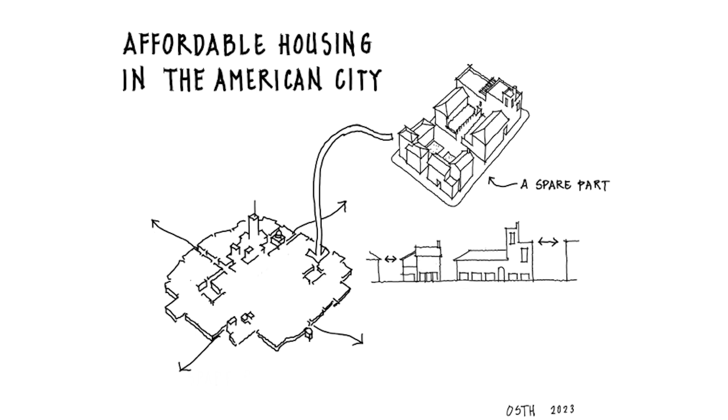I want to reference the talk Hugh gave to kick off the conference, about Cat Fiddle Street. This is another project very similar in the sense that you're trying to create a sense of wholeness about a neighborhood, using innovation at the same time to deliver a place that feels like it's always been there.

Witold also referred to the book by Christopher Alexander, A New Theory of Urban Design, in which he unveiled five principles for development. He also added agency, and parenthetically I'd like to add a sixth, which is stewardship. One important thing in the book is that Alexander was talking about that sense of wholeness within the project, but also within the city.

So the relationship between what Cat Fiddle Square is doing and what we're talking about today are very similar challenges. Ray will take us through examples of developing those same principles: a sense of place, ease of getting around the city, enhancing the city while providing a diversity of income to avoid concentrations of poverty. In many ways, the big picture here is like a spare part trying to fix an area of the city.

We are very lucky to have Hugh Petter here from the UK, who's come across the Atlantic to share the project of Nansledan in Newquay, UK. This project is almost like a new town, built from the ground up even though it's an extension of an existing town, built with traditional patterns to develop jobs and opportunities, sustainable practices, and a remarkable 30% of affordable housing.

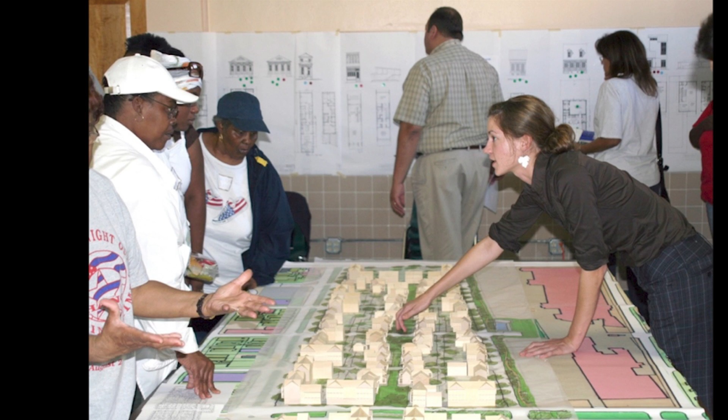Well, the developers went through the roof because they claim it's much more expensive to do individual houses than to do townhouses and combined buildings. So this is where the pattern book idea comes in, of standardizing the box, or letting it be whatever the home builder wants to do, and then having the front facade as something that's tailored to that culture and that particular place.

You can see a street elevation from the design at the bottom, in which we have a collection of buildings, including a double shotgun. I didn't point out that the Volkswagen was in front of 2 units, not 1 unit, in that previous image. It's a really skinny house going back, and creates a varied street facade, which you can see here on the right.

For me, the greatest moment was when the president came to cut the ribbon for this project in 2012. He spoke of the revitalization of Treme, not of the Lafitte project. So it had become part of the community, and therefore that stigma has been released.

I'll talk about it again a little bit. Early project, 1978.

Richmond, Virginia, an African-American neighborhood with an affluent part on the left, and a large area that had been cleared for urban renewal. There had been several plans, but after talking with residents, we came up with another—really the first pattern book. They asked us to design all the houses, and we wouldn't do that. We thought there needed to be more variety. But we did do facades.

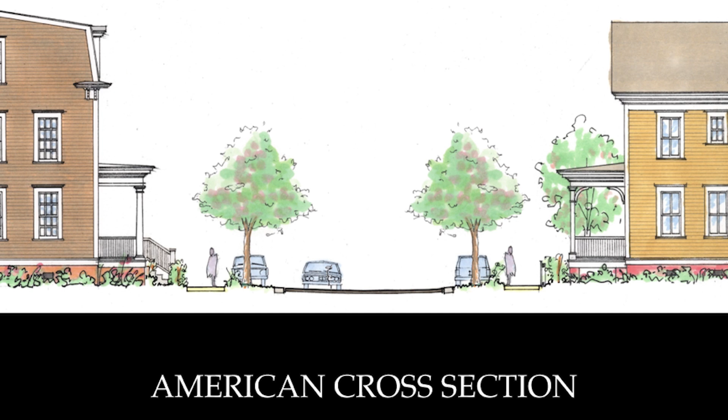We have a responsibility to the community to maintain our property and treat it well, and to take care of it, watch it, supervise it, make sure it works. Here is one in Tampa and one in Edenton, North Carolina, where we have streets lined with these porches, with these in-between zones on the side, to create a unified example.

Back to the Randolph neighborhood that I showed you earlier, these porches are super large for the size of the houses. They're tiny houses with big porches on them. And we had a couple parks in the plan.

This photograph was taken in 2018, more than 40 years after they were built. Immaculate. The park is not maintained by the city, it's maintained by the neighborhood, by the families around it. And every time I go to revisit it, the same thing happens.

The most recent one was a little more entertaining. My wife and I were going to a meeting in Richmond one Sunday afternoon, and we stopped on our way and parked over there on the left, just about near that fire hydrant. And I got out and started walking around, and my wife stayed in the car, and she was observing things.

A man came out from his house, opened the door with a broom, and started sweeping. Then the next door neighbor came out with a broom, and then 3 or 4 ladies down the street came out with a broom. So finally my wife figured she better do something. She went out and started talking to them, and said, well, my husband is an architect and was involved in designing this. So the man turned into the house and said, 'it's that architect again, he's come back.'

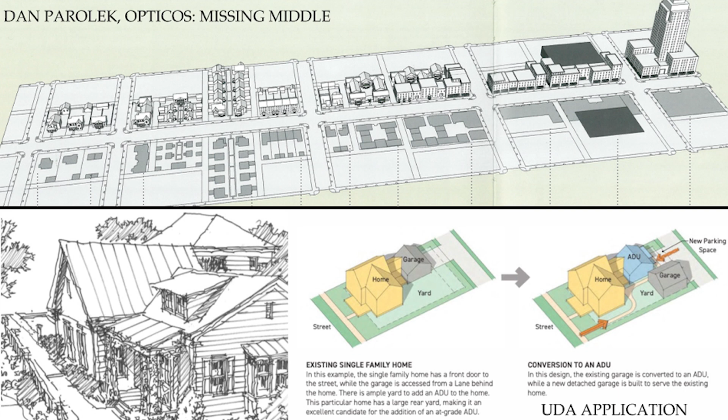Dan Parolek of Opticos has done a great service in his Missing Middle book, which you see on top, looking for different kinds of types—courtyard houses, accessory dwelling units, and other things. UDA picked up on that with a pattern book with recommendations for how it might be done in a specific location. Union Studio took it quite literally, looked at their building types and prototypes, lined it up, and used it as a strategy for going into neighborhoods.

In New Orleans, in the project I showed you, we have a lot of diversity of building type in terms of the different types of houses, and there's even a senior building broken up into several buildings. However, it was intended to be mixed income, but it was right after Katrina. It took a long time to get it built. There were a lot of people who evacuated to faraway places with an urgent need to get back, and the policy was changed to make it all public housing except for one block.

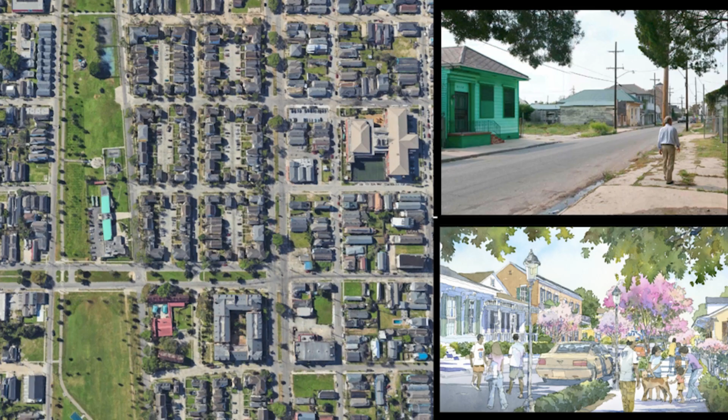So here it is from the air—you can see it. And I was really depressed about that. I thought, we're not going in the right direction.

Treme had been in terrible condition but suddenly became a hot property, particularly after the Katrina restoration, when New Orleans became a hot location. People were buying falling-down houses for $200,000 to $300,000 and fixing them up. So Treme is becoming gentrified, but we have this stock of permanently affordable housing, so in the larger sense this is a diverse community. That's another strategy we can think about.

Final topic is legible and easy to use, and it comes back to Alvin Schorr. He said there's evidence—he combined a bunch of studies and analyses to make these points, and these are not just platitudes. Our ability to understand the city and to use it is directly related to our success in life. So I've personally felt, at the beginning of my career, a moral obligation to try to design cities that people can understand and use and easily function in.

The Great American Grid, an equivalent grid that connects every door to every other door, comes back to the title. The key thing is the relationship of the front door to that grid, so that you are connected to every other door, which means connected to opportunities and new experiences.

This little guy here, when we look at the larger picture, is on a street in Manhattan, and his street connects to other streets—maybe not providing a direct pathway to Wall Street, but it's there. Of course, it's the Horatio Alger tradition of rags to riches. The American 19th century, early 20th century city has been called the most efficient upward mobility machine in history because of this.

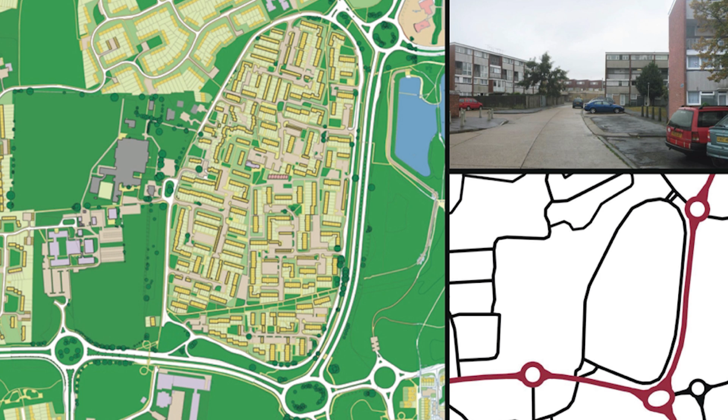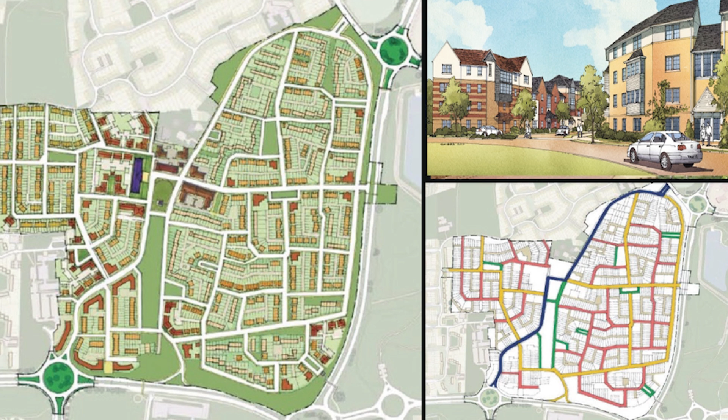Of course, our proposal was to add streets, complicated by the fact that more than 50% of the existing buildings had to remain. When we did it, some people were very nervous—they said our children don't know how to cross the street, because the only streets they'd had were the highways around it. Now, if you're preparing for life, can you imagine if you enter life and you can't cross the street? What are you going to do? So this stuff can really hurt people, and did for a long time.

Final example is one I'm involved with now—original conception, and now as a backseat driver. This is downtown Norfolk on the left. You can see, easily, three different public housing projects with 1,700 people in them. You can also see, if you spot that round shape, the Nervi Stadium arena, and a huge highway separating the downtown from this lower project. The question is how to bring it together.

It's also an area that floods very badly, particularly on the right-hand side of the site. So the plan did several things: created a carefully designed park to manage water, a network of streets—a major north-south street connecting the Martin Luther King Memorial on the north to a mid-19th century beautiful Catholic basilica—and connecting streets that link it to the city, with buildings of different kinds of uses fit within that framework.

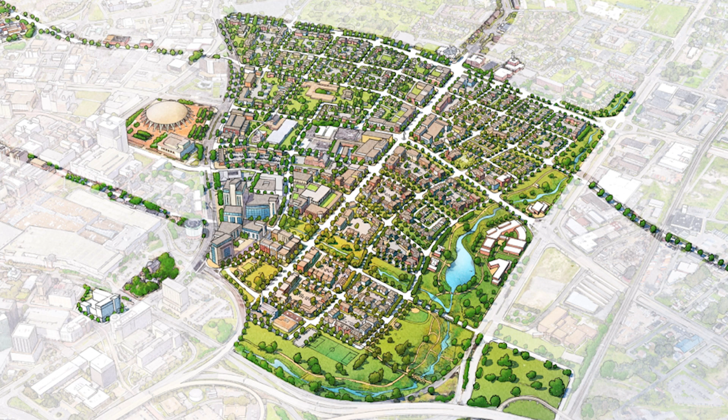So you've got to get that framework right by then. And these are some of the images of those spaces which are meant to be the orienting spaces so people can find their way.

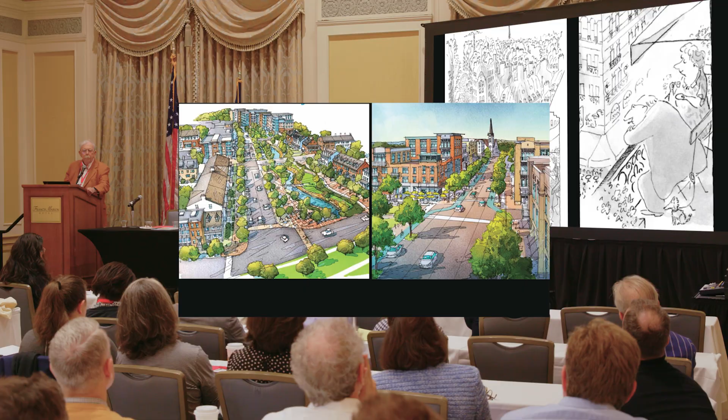I'm going to conclude with Sempé. This wonderful image of an imaginary Paris. You see two people looking extremely self-contented. So there's no image problem here. They're looking out at the neighborhood, which we know looks after everybody, including cats.

And they can clearly see and understand the structure of the city. This is our ideal. But look carefully in the upper left. There's something sinister up there. It's a construction crane. I think the man is looking at it, wondering, is that going to help us continue this tradition, or is it going to undermine it? I think the former is our job. Let's do it. Thank you.

Ray, that was fantastic. You certainly set the bar pretty high for me, but I'll do my best to follow on. Can I just say, first of all, what a pleasure it is to be here. It's my wife and our first time in Charleston, and thanks to the ICA and everyone who's made us so welcome here. It's been the most fantastic visit, the most fantastic conference with some great talks, very stimulating as well, and it's a great pleasure to be part of that.

They say that our two countries are divided by a common language. I'll do my best this morning to disprove that assertion, but I apologize now if I say things which are not familiar to you, and by all means, let's pick them up in questions at the end. So I'm just simply trying to address the theme which Eric gave.

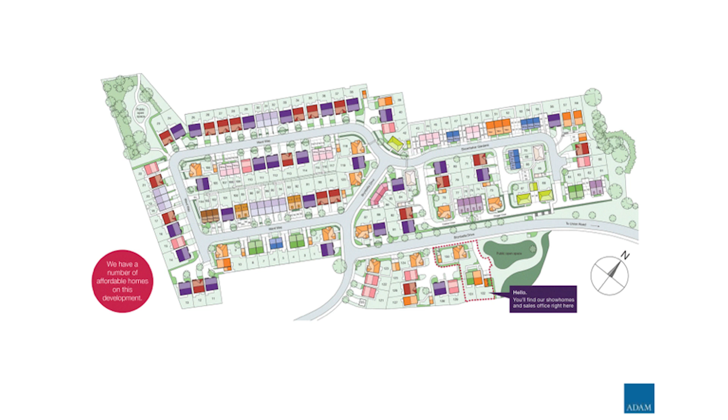It's not beautiful, and it's got this very poorly defined public realm, as you've seen in some of the earlier slides and presentations today. And these, of course, as we've heard already, are very depressing places to live and can be the cause of all kinds of other social issues which become much more difficult to unpick.

And because of all these issues, development is not popular. It's ugly, it has no benefit for those affected by it, and because everything is tuned to deliver maximum short-term financial return and not necessarily meeting local needs, all the developers'

needs, which are at the top of the pile, if you like, it becomes very difficult to convince people development is a good idea. And to my mind, it's become a vicious circle where, because of bad development, it's unpopular, it creates political pressure, there's yet more regulation.

Which increases the cost of permission, thereby reducing the gene pool of developers even further, and so it gets worse and worse and worse. And that's been a progressive problem that we've been wrestling with for a very long time.

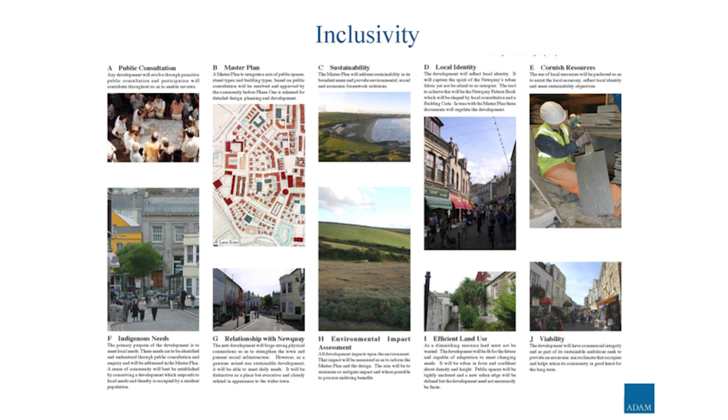Making sure we respond to local needs, making sure what we do relates to the older part of the town, thinking about environmental impact to try and improve the ecology of the place by weaving that through the scheme as well, using land efficiently, and making sure, of course, that it is viable. In this economically deprived area, viability is quite challenging.

We've been on site now for 8 years, and we have been building at 100 houses a year. We've got about 650 houses built at the moment with a wide variety of tenure types and sizes, as again you've heard from Ray and others. The idea is that we're the only people really in Cornwall building family houses.

Newquay, where this town is built, is the surf capital of Britain. It's got the best surfing beach in the UK. Someone even amusingly called it Surfbury when it started, but that's another joke.

The idea is to create a place where you can bring up a family, and over your own life you can move within the development too. So there are starter homes, family homes, homes for older retired people. The idea is to create a community where people can move but stay close to their friends and build that sense of togetherness.

Within the master plan, and I think this is something slightly different from some of the earlier phases of Poundbury, we've been very dogmatic in our coding of it to create a clear street hierarchy where the typologies of the buildings relate to the different types of streets. So this is our main street where we've got grander architecture, grander boundary wall treatments, bigger front gardens, 2.5-story buildings, grander use of materials and so on. So whether it's an individual villa, a semi-detached house, or even a small apartment block, typologically you know you're on a main street because the buildings reinforce the urban network created through the master plan.

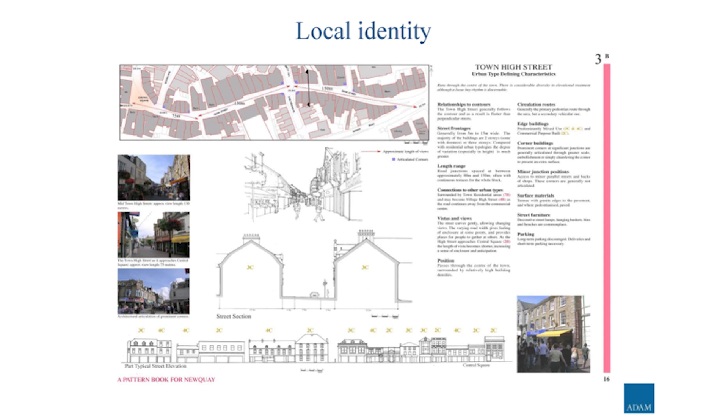This is the High Street in the old part of Newquay, looking at how it responds to topography, the size of the view corridor, the canyon of the street, and the types of buildings that define its edges. Really just trying to understand the nature of the kind of space which is familiar to people, and also thinking about that Atlantic coast with severe weather - we find the streets are often quite tight to give that degree of protection from the full fury of winter weather.

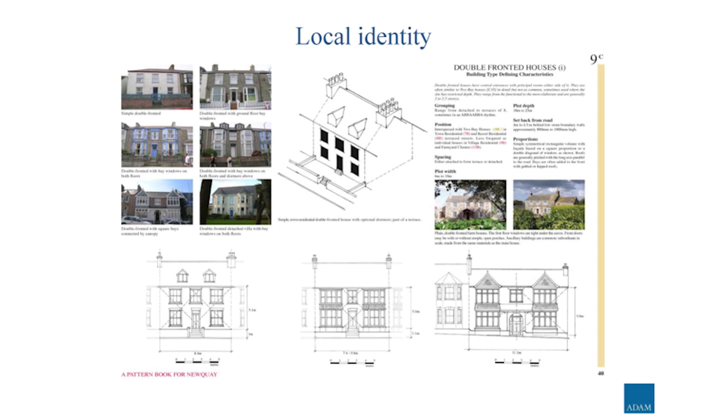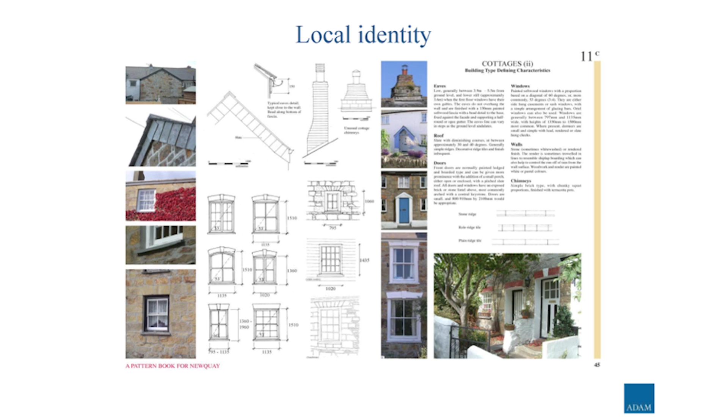We look carefully at the sources of local materials. There's not a huge choice, but we know from tried and tested buildings of different eras that these materials respond well to a harsh maritime climate. So we need to look carefully at how we can work with the quarries and producers to make it possible to use them again. I'll come back to that.

We found the pattern book we produced was playing back to that local community who'd become visually blind to the character of their town, as we all are to a degree by familiarity. When you produce a pattern book, people see their town with new eyes. We used to describe it as a maypole around which everyone began to dance, because it got everyone excited about what was special about their town and how you could start to do new and creative things with it. Also, with the materials, it's how you put money back into the local economy to create better economic sustainability.

My third point, again picking up on Ray's phrase, is the dwelling as the mirror of self, and that sense of self-identity is hugely important. Everything that Ray said, I completely agree with.

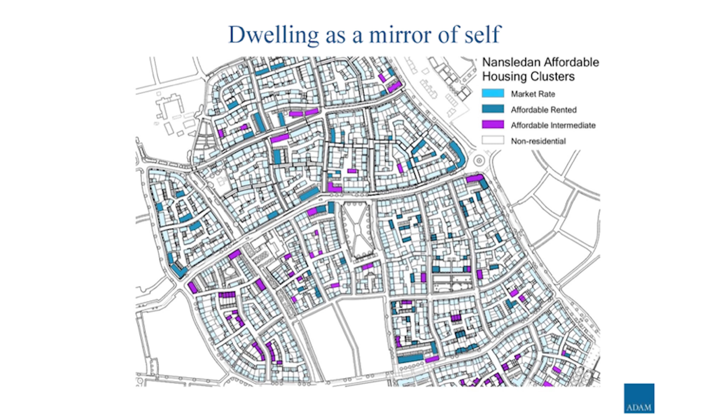I mentioned the issue of the holistic view of sustainability, and I'm now on a zero carbon working group for the Duchy. The buildings I'm showing you here are what in the UK we call a LETI standard, which is almost passive house in terms of embodied carbon, but we're using local materials. We achieve that by using local slate, which has low embodied carbon, and concrete blocks made from China clay waste, a local waste material 10 miles from the site.

So although the built materials are traditional, by taking time to understand what you've got locally and working with the suppliers of those, you can start to make a huge difference in the amount of embodied carbon you use.

With the granite quarries, we found out what shapes of granite they could use and make cheaply. Some of the granite is quite rose-coloured and some is silver. The silver granite is generally used in the City of London—it's the most expensive material, which we can't really afford. But 40% of what they produce is the colour with iron flecks, the rose-coloured stuff, which we think looks fantastic. So we take everything out of the quarry that they can't sell to London in terms of the variety of material.

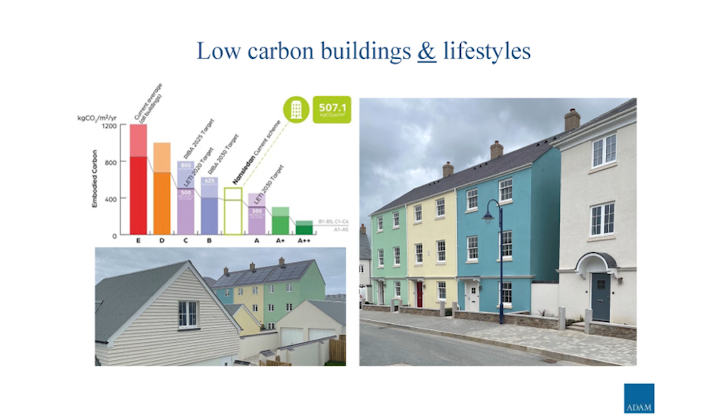To the credit of the council, they said, unlike normal policy which takes a 5-year view of future need, take a 50-year view of what the needs of this town are. So you can think long term, and then work back from a big vision into shorter term delivery horizons—everything fits into a bigger picture.

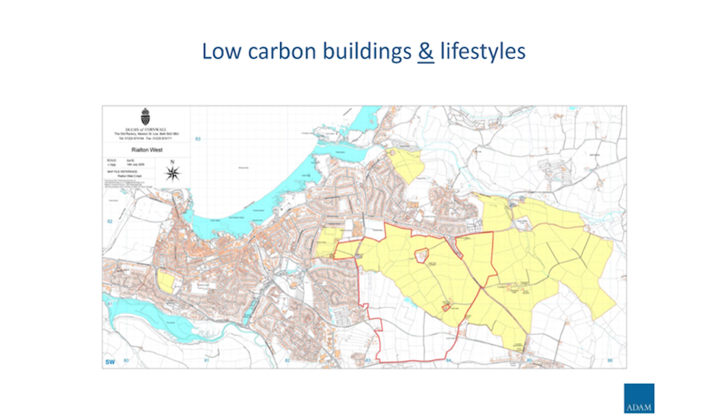And the vision was to create a new sub-town centre to support the existing suburban areas as well, to help revitalise those, as well as meeting the needs of our new community.

We're building at 100 houses a year, so it takes a long time, but you're building in tune with the pace that material suppliers can keep up with you, and at the saturation rate that the local market can absorb as well.

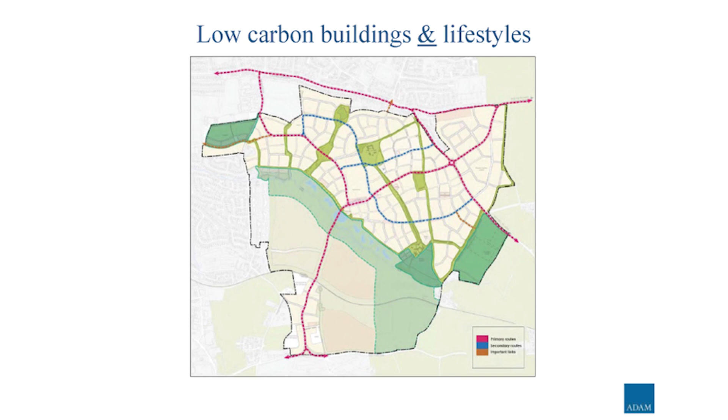As a firm, we've developed network analysis software, which we market as Place Logic, and it produces a heat map of the desirability of some routes over others. We were challenged in our design review process as to why we put the commercial units where we have in our local town centres, and through this software we're able to show that in each case, the commercial units are located on natural hotspots on the network.

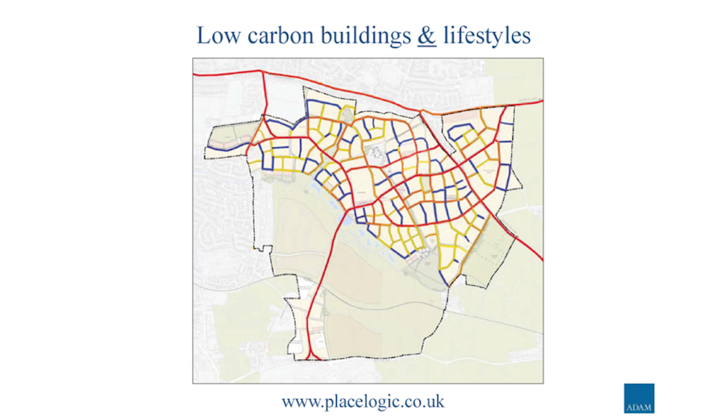And we know from experience with the software in other places that it does actually work. And we've now started to build some of these centres, and they have all thrived.

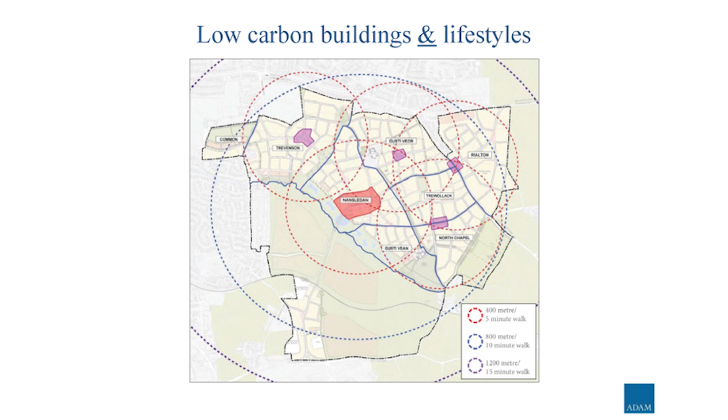This is showing where the local centres are in the master plan. The idea is that within where you live, within 5 minutes everyone can walk to some shops and some amenity, and within 10 minutes you can all walk to Nansledan, the new Market Street town centre.

As I say, we built the first of our local centres, which had 14 units. They were 1- and 2-bedroom affordable flats, so you get 3-storey buildings, which help to define more significant squares.

We've now got about 40 of these little commercial units built so far, and we've got another waiting list of 40 more companies locally that want the same kind of space.

So the perceived wisdom is that no one builds employment space because it's not viable, but actually building them in this way, there's a huge need for entrepreneurial little businesses to get going with ultra-fast broadband. And if you do it as part of a mixed-use scheme, in placemaking terms, you're making a virtue of it as well, and helping to get people into local employment where they can walk from where they live.

Some of you will be pleased to know, unlike Poundbury, we've incorporated the Art Deco, which to our mind is part of the seaside vernacular. Of course, the compositional principles are fundamentally classical, but it's very cheap to build, and hopefully it has something of that light-hearted seaside character to it.

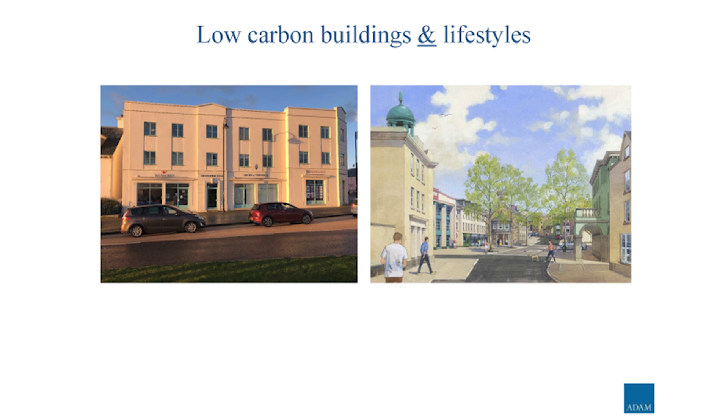We also have a spoil strategy for the earth that's moved during construction. A typical house on one of these schemes uses about 100 cubic yards of material, which normally gets taken off to landfill somewhere else. Doing that has an enormous carbon footprint and costs a lot of money, and all the neighbouring towns get fed up with 40 years of trucks rolling past their door as well.

So in this instance, we decided to put that spoil on the hinterland of the development, and because the land is sloping, we've created a series of terraces with community gardens and orchards, which is another amenity, if you like. Once you've made up the ground like that, you can't build on it in the future, so it's sterilised from development in perpetuity. And it saves a lot of money and a lot of carbon. On this scheme, we reckon it saves about £6 million, which again you can use to go back and build some more affordable houses and do something of local worth.

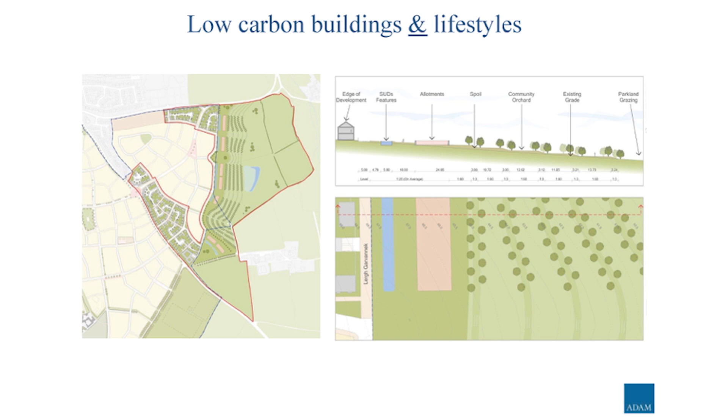So my last point is the secure delivery. I often say only half-heartedly that design is the easy bit, and particularly with the talent in this room, it really would be the easy bit. But it's how you can deal with the issue of stewardship or secure delivery where the main problems arise.

I often say with planning, what's promised at that stage is broken, which is one of the reasons why communities are so suspicious of new development. So we've evolved a new way of going into contract with the developers, a partnership if you like, to make sure the landowner remains involved all the way through, and that we can actually work with the developers to deal with the issues they've got. So we have a landowner's vision and the commercial acumen of the developer working in partnership to create the best possible outcome, which is called a common aspiration.

The way it works, there are a series of vision documents, which we haven't got time to go into today, to do with energy, sustainability, water, food, all the aspects of sustainability. The developers are legally obliged to deliver the scheme in accordance with those vision documents. Rather like Gary was describing yesterday, we have various gateways we go through in terms of sign-off, but the final sign-off stage is the end of construction. So only when it's been built properly can they sell it to a third party.

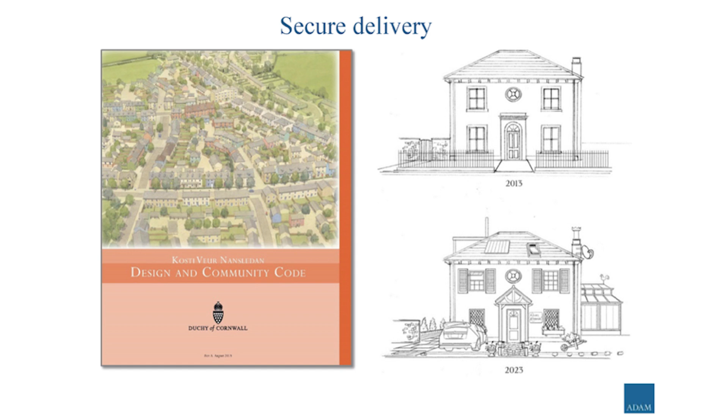Now, I've nearly finished, you'll be glad to hear. But because of this, and because we're able to deliver better development than can be required by normal planning policy, we've been invited by the local authority to apply what's called a local development order, which effectively gives us a detailed planning consent for the whole scheme within certain agreed parameters.

I was discussing this with Andres briefly last night. In terms of an engine to regenerate a depressed economy, if you want to come and build a house or an office block on this scheme, we can be on site in 6 months with no planning risk. And with a 50-year or 40-year vision, taking away the planning risk becomes a huge attractor to get businesses there to help stimulate this economy and create a more dynamic place.

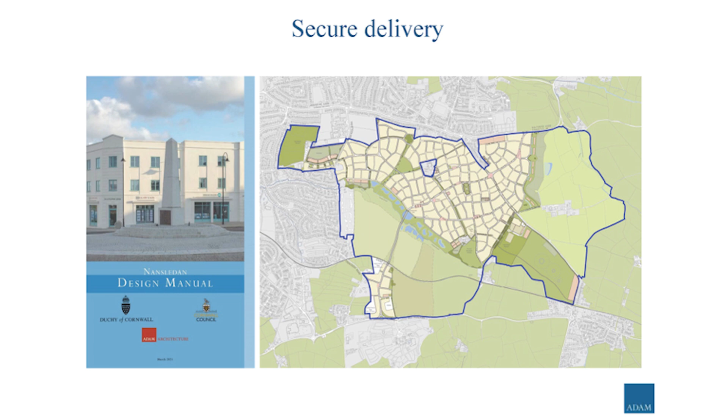Some time ago, an institution called Create Streets, which now Nicholas Boys Smith, who runs it, runs the government's Office for Place, did an appraisal of Nansledan and this whole issue of how you can make development popular. This scheme has gone from 400 homes to 4,000 because it is popular.

And the Prince's Foundation have done studies too, looking at this additional build cost and the sales premium. And we're now looking also at the resale values too, and we're massively outperforming the local market in terms of the price increase year on year.

We also monitor the postcodes of the buyers. So apart from the 30% of affordable, which obviously are local buyers, 70% of the open market houses are also going to Cornish postcodes. And that meeting that local need is obviously hugely important spiritually.

As a consequence of all of this, we're now on the front cover of most recent government documents on planning as a sort of exemplar scheme, but there's a lot more work to do. We're going to have a change of government probably in 18 months' time, and so we're waiting to see what will emerge from the new regime.

And we're now building up a portfolio of these sorts of projects across the UK with landed estates, with local authorities, and starting to work also with pension funds whose view of their financial return is attuned to this sort of long-term building up of long-term capital.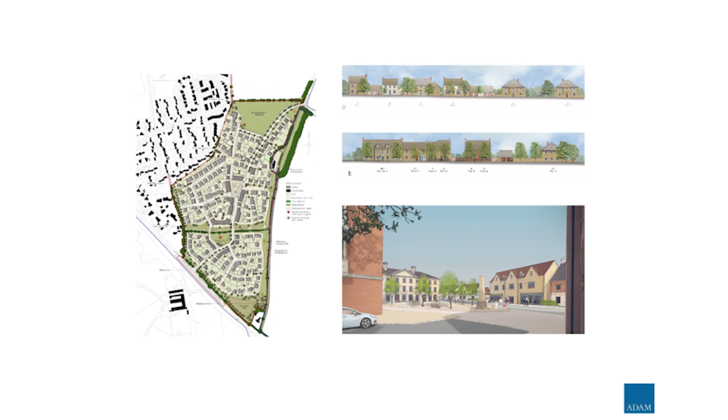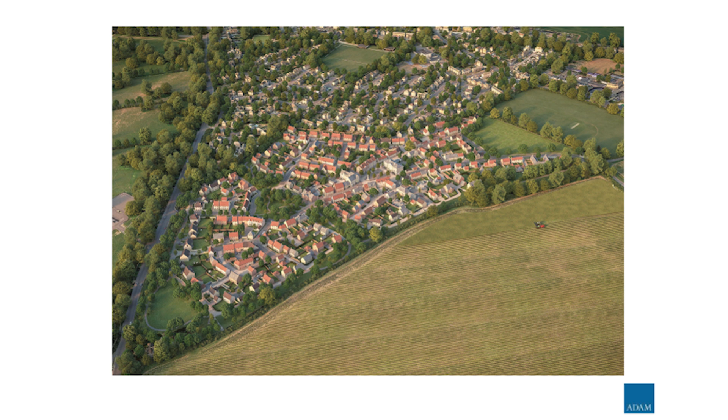So that's an aerial view. This is a CGI view. The Blenheim Park is on the left-hand side of the road, you can see on the left-hand side. And the ploughed field at the bottom of the image is where we will have phase 2 in due course. We've left tails in the right place on the roads to make sure we get decent connectivity down the line.

This scheme is also on site. We've built about 200 homes so far. And on this site, 50% of the houses are affordable. So every other house is an affordable house. But again, they're in tenure-blind clusters.

The policy here is a 20% discount on open market rent. But the estate think that's not enough, so they're offering a 40% discount voluntarily. And because the rent on the affordable housing is inflation-proof, and every 40 years the affordable houses are recalibrated to see if there's still a local need for affordable housing or not, for a long-term asset holder like a landed estate, they can take a long-term view of that because they've still got the income in the meantime, which is covering their costs, and down the line there might be the carrot of an open market house as well. And of course they're also meeting local needs in the meantime, which is important to them as well.

But in spite of all those statistics, the open market houses are selling for a 25% premium as well. So even though every other house is an affordable house, the open market houses sell for a significant premium. So this idea that affordable housing is a blight just isn't true, particularly in affluent areas like this.